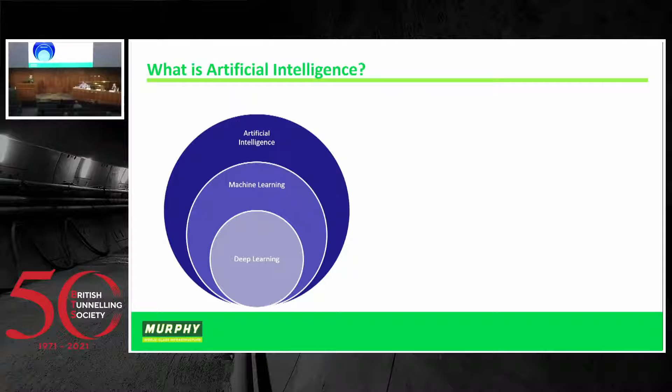Within this, we start getting into machine learning. Machine learning is a series of algorithms that learn underlying representations from data and try to learn the underlying patterns from data. Within this, if we go a little bit deeper, we get into algorithms that use huge structures called neural networks, and this is going to be the body of the work that I would have done whilst at Murphy's.

Breaking this down even further, we get 3 different fields of machine learning depending on what your needs are. If you are looking to try to predict what the fuel price is going to be, or whether someone's wearing their PPE, you'll probably rely on supervised learning for your prediction and forecasting.

Should you have any data that you wish to cluster, or if you have too much data that you wish to make a bit more concise, you would turn towards unsupervised learning. And finally, should you have any robotic excavation, or you're looking to control factories, you would turn to reinforcement learning.

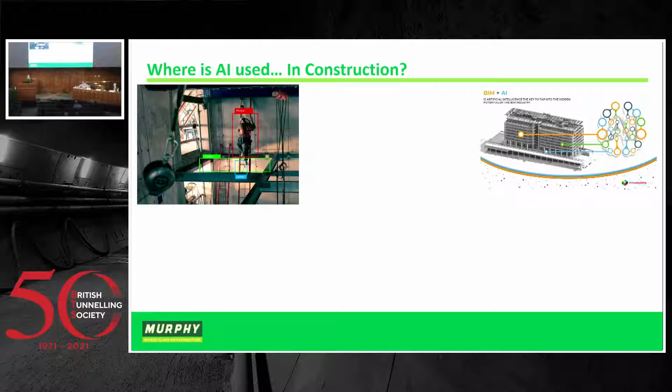Now, it may sound like it belongs in the realms of fantasy, but AI has actually already entered the construction industry. From looking at images and trying to understand whether someone's in a safe environment, to working with our good old friend BIM to make sure that teams are working more productively, ensuring that our suppliers are developing optimal logistics solutions, and, to my personal favourite, robotic excavators to address the skill shortage gap.

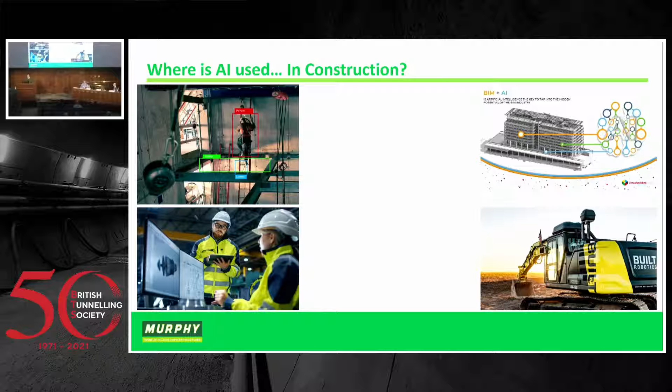Now, this all sounds very interesting. Some of it might even sound a little bit niche, but the value which AI is forecasted to bring into the construction industry is worth 1.8 billion for this year, which sounds quite big. And in 6 years' time, that number's going to get even bigger, looking at nearly 5 billion's worth in AI's value to the construction industry.

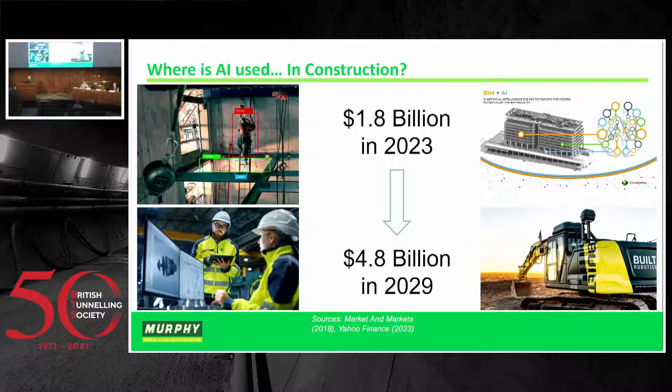Now, I was interested in trying to use AI in the tunnelling industry because forecasting tunnelling is difficult. I'm sure I don't need to remind any of you of that. And a lot of this difficulty stems from the tendering stage, where you have masses of data of all shapes and sizes that you're trying to process and understand.

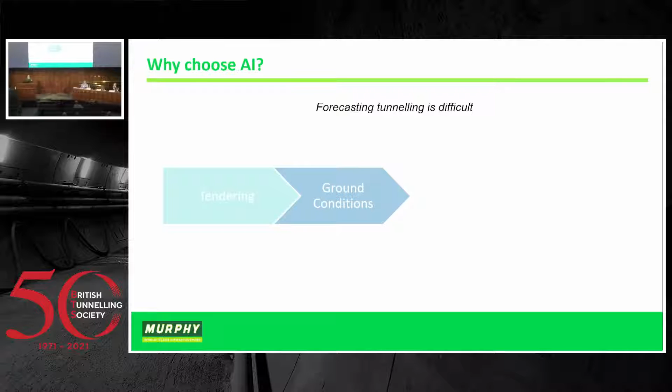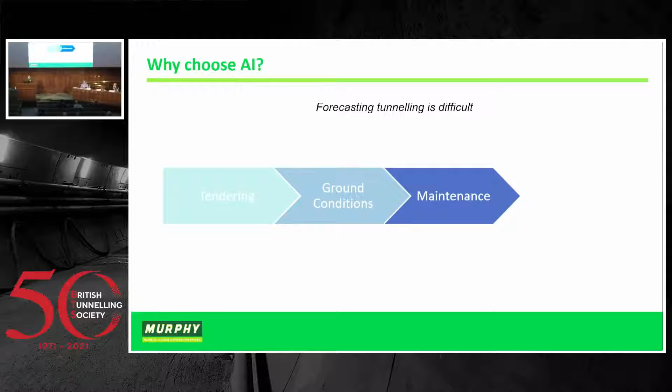A huge source of this variation comes from your ground conditions, which can range from your sands to your clays to your silts to groundwater levels, and all of this variety impacts your machine. This raises complications on when should we get fuel in for our machine, when should we get the teeth changed, and when are we going to have severe breakages. And these are all problems that project management need to address.

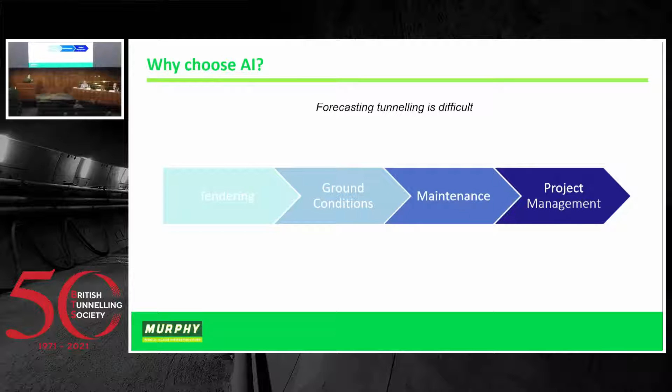And all in all, this data is a bit of a headache for project management. And AI could be a solution to try to condense this information so that we have data-driven approaches.

Now, I approached Murphy and Sons with this crazy thought of trying to put AI into tunnelling. Now, unlike some of the other sections in construction, tunnelling is relatively untouched when it comes to AI applications. Most of it is residing in the realms of academia, and there was a bit of uncertainty around this, and for good reason.

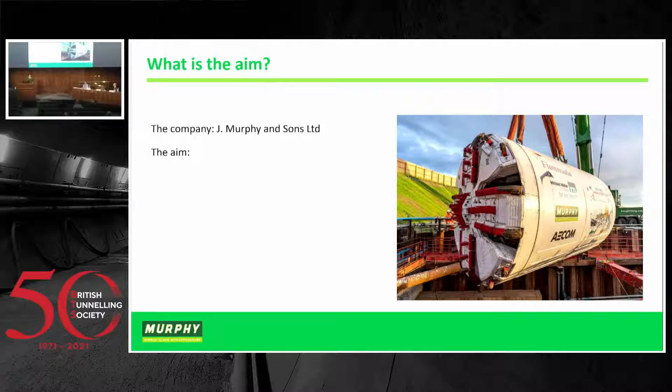We weren't too sure how well AI would actually do, or if it would be any good, leading to the main aim of the work I'm presenting today: establishing whether it is feasible to use artificial intelligence in the tunneling industry.

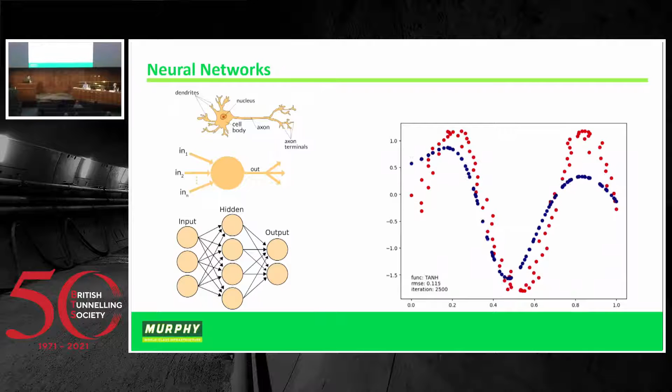For that, we need some tools, and the tool I'm going to talk about today is neural networks. These are a type of machine learning algorithm inspired by the brain. They take in a series of inputs into something called a neuron, and generate an output. All of these outputs are connected to form the network, and the weights connecting each neuron undergo changes during training as you try to fit your output to the underlying pattern of your data.

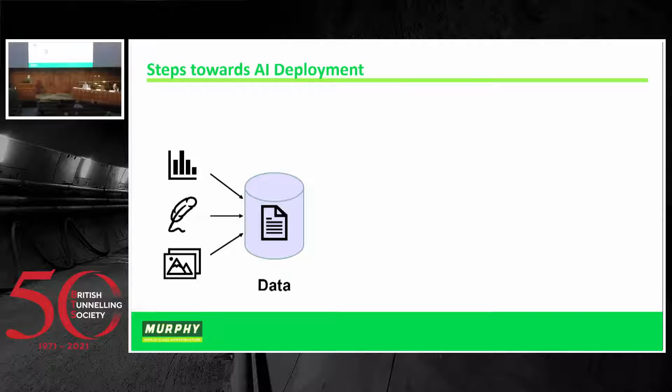This all sounds very exciting. How do we go about actually establishing it? Well first, with any AI-driven solution, you'll need some data. This can range from your humble Excel or PowerPoint to handwritten documents to images and films of your work site. The data can be anything you can imagine. But the most critical stage, and the reason why so many AI solutions flop at the first hurdle, is that they don't undergo proper cleaning practices. If you're putting bad data into anything, you're going to get bad results out, AI included. This is the most essential part of the whole program.

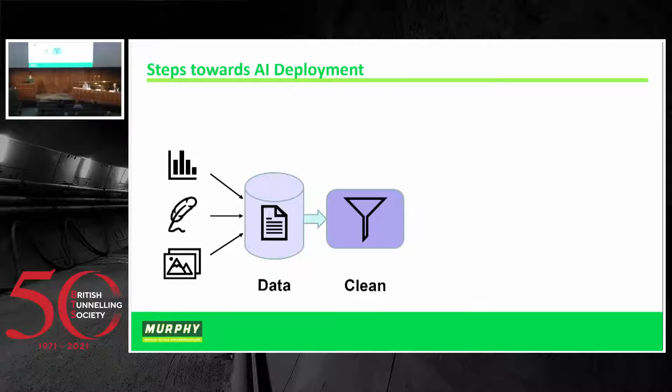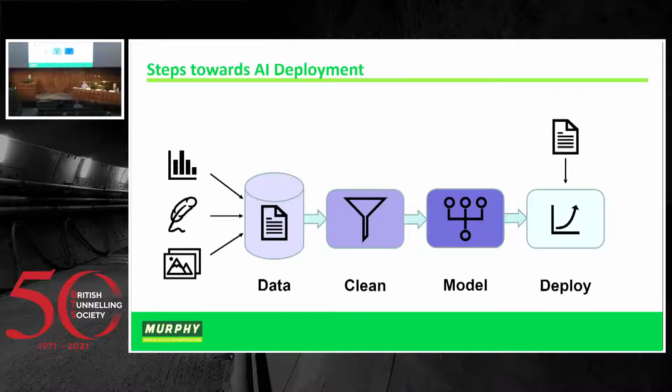Once you've collected your data, the next stage is to select your model based on the problem. For our example, we're going to use neural networks because we're looking at trying to create a prediction. Once we've trained our model on this data, we're ready to deploy it into the real world, where we give it new data and it can generate outputs that can be of use. Now comes the exciting part.

I'm going to talk to you today about two case studies. The first is a historic cable tunnel, which was used as our feasibility scoping exercise. The primary data set consisted of machine data and a bit of tunnel data, and this was a potential application for machine performance. The second, the North Bristol Relief Sewer, used purely geological data only, no other machine inputs. Its application was to be in the pre-planning tendering stage, or for forecasting how the rest of the build would go.

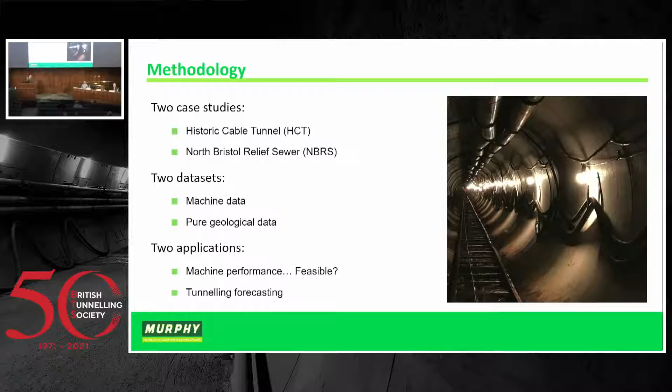Now, this historic cable tunnel was not an easy data set. It contains several parameters we were trying to work with. We've got some horizontal alignment, a bit of groundwater here, transitions from sand clay to chalk. And there was a bit of skepticism at this point — we weren't sure how it would work.

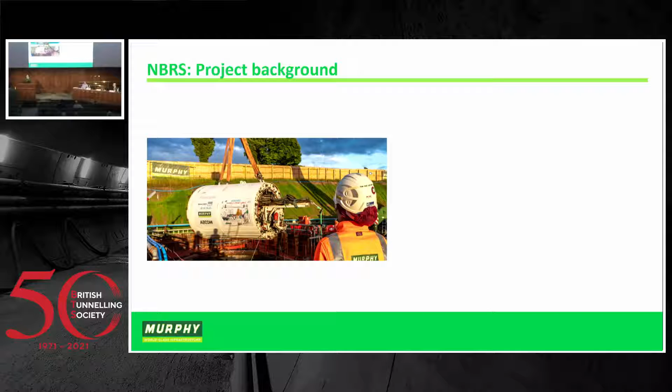This was exciting. Murphy was very excited, and the construction industry has plenty of other challenges to go for. This is where we put artificial intelligence to a proper test, starting with the North Bristol Relief Sewer. Here we've got our machine — it's an EPB Lovat, about 2.85 meters in diameter. The North Bristol Relief Sewer project is a tunnel about 5.5 kilometres long. At the time I finished working on this project, it was about 3 kilometres in.

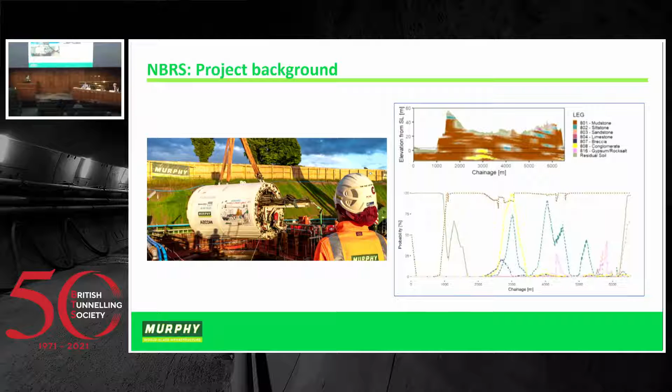The data set we used for this was given to us by Maxwell, and these are probabilities of the likelihood of coming across different ground conditions. This is where the challenges start. We were around here, and you can see some pink spikes and this lovely spike of sandstone. We only had this data to actually train our model.

Now, this is what we were expecting to see, and we had very little data on this sandstone. How is the machine going to behave when we go through sandstone? We've also got some additional water around this stage, and some extra gypsum over here. We haven't really got much information at this stage to go on. On top of this, you do not give your machine all of this data.

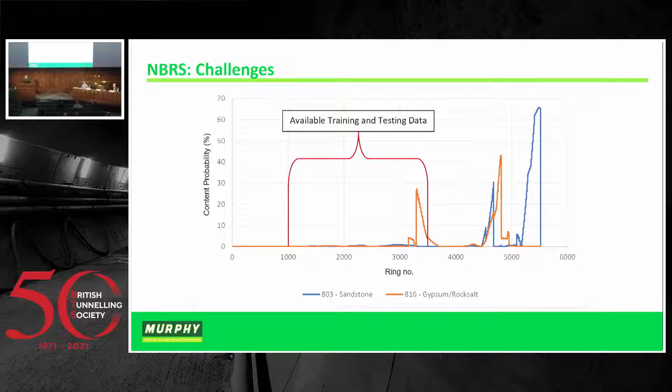You need to keep at least a third of the data away so that you can test that it's working. This makes it very challenging and means AI is going to have to learn the underlying behaviours of this ground if it's going to make good predictions. A further challenge to this, we have some outliers.

The aim of this project was to try and predict the ring cycle duration, that's the whole process it takes to make one ring. We're talking from the muck to the excavation to the logistics for the total ring. And there's a lot of other data points that aren't captured, meaning we've got some big spikes in the data and we don't always know why that is.

So how was AI performing? Well, on this sample of data, bear in mind this neural network has never seen any of this blue data before. If you were a project manager and you were just given this orange line of the neural network's predictions, you would see you're going to be expecting some tough times around this stage. And as you come later towards your build on ring 3290-ish, things are going to get a bit calmer. This can be very useful for trying to prepare how we're going to do maintenance, for example.

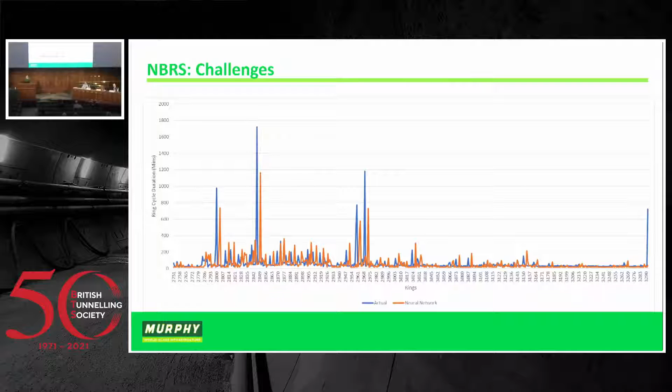But we're not stopping there. This is a small appetizer to what the real challenge was. We wanted to know when artificial intelligence thought we would finish this excavation by. So we fed in some data, churned a few cogs, and this is what the artificial intelligence would generate.

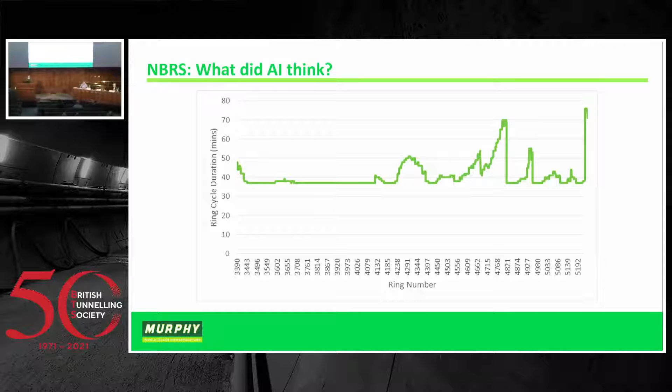Okay, so it thinks we're going to be having a bit of trouble here, a couple of spikes here. This might be the sandstone. And bear in mind as well, this was based on the average rings per week being around 63 rings per week at this stage. Now, this is where I would finish my predictions for Murphy.

I submitted my results mid-September. The neural network was not touched again for the whole thing. Any new data that came in, we would have to see what this neural network would do. And I predicted a finish on mid-February. The neural network was within 10% of the final date.

This is considering that it's predicting that massive spike of sandstone that we have no information on, the huge spikes in gypsum, all the other uncertainties, and this is also considering that the data it was trained on had an average rings per week of 63. What it actually was after that point had raised significantly to 111. The neural network had managed to actually capture that big jump in performance, predicting an average of 95 rings per week. This was an exceptional performance.

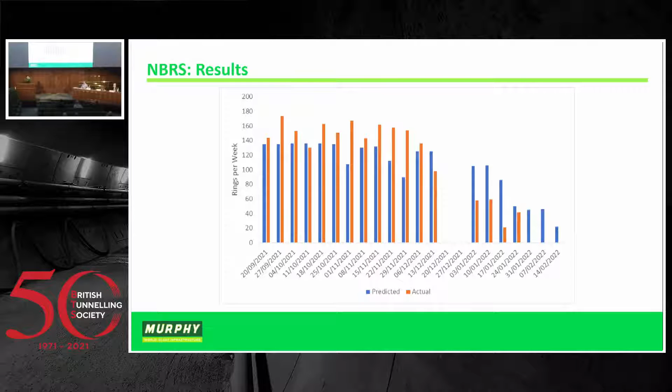Because of the results of this, this generated enough excitement for Murphy to start undergoing the process of bringing a PhD student on board to try to deliver future work. We're looking at trying to make this more of a reality.

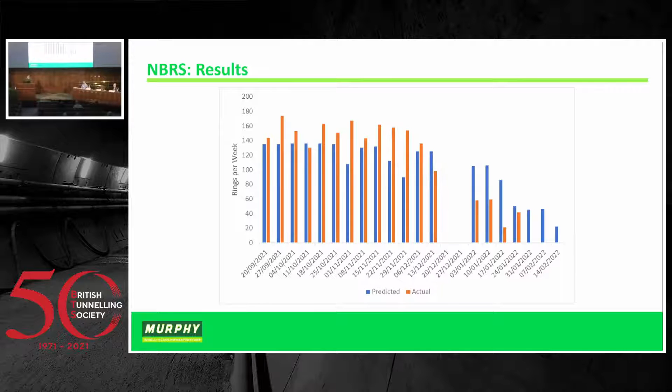And there are benefits to Murphy. We've got a model with very high predictive accuracy, and it's data-driven. We're not relying on as much guesswork. We're using the data that we've got, and we're compressing it down as something that's more manageable to help support project management in delivery. It was also shown to be able to capture the underlying behaviour and to be able to predict new data that it hadn't seen before.

And this can be very important if you're at the start of a tender stage. It can be the difference of deciding to go for a project and deciding this is too much of a financial risk for us to continue. And you can look at the best and worst case scenarios.

There's huge potential for Murphy, but also to the tunnelling industry. It's a benefit for all stakeholders as we can start having data-based decisions and start understanding where we might have problems and ensuring better planning. We can have huge access to future work.

And as a little note as well, this was also a benefit to academia. This project that was done at Murphy is unique because prior to that, all of the research at that time had only looked at predicting data on a completed tunnel. There hadn't been any predictions on a live tunnel, so we're breaking ground into new researching territories.

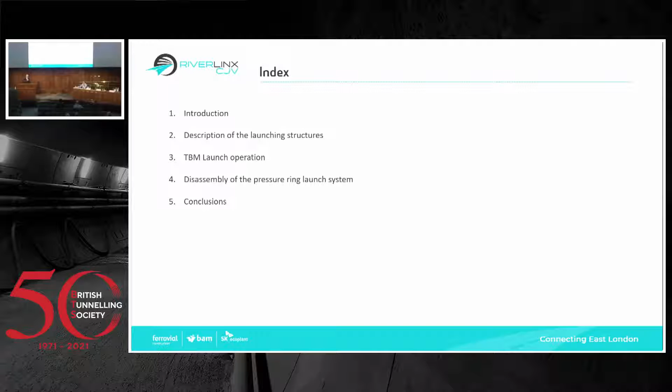So our agenda for tonight will be a quick introduction of the tunnel, speaking also about the reasons we had to adopt the method we have used and are currently using. Then I'll move on to the description of the structure involved during the operation, the operation itself, followed by the disassembly of the launching structures, and finalizing with some conclusions and the lessons we took after our first launch.

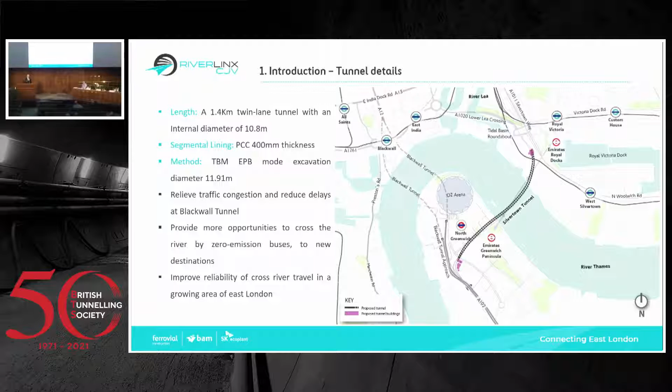So the Silvertown Tunnel project will be a 1.4-kilometer twin-lane tunnel constructed with the intention to relieve traffic congestion and reduce pollution around the Blackwall Tunnel, and also to give opportunities to cross the river using public transport with new passage routes. This tunnel will have an internal diameter of 10.8 meters with 400 mil thickness segmental lining. The tunnel is being constructed using an earth pressure balance mode tunnel boring machine with 11.9 meter excavation diameter, which is actually the largest TBM ever built in the UK.

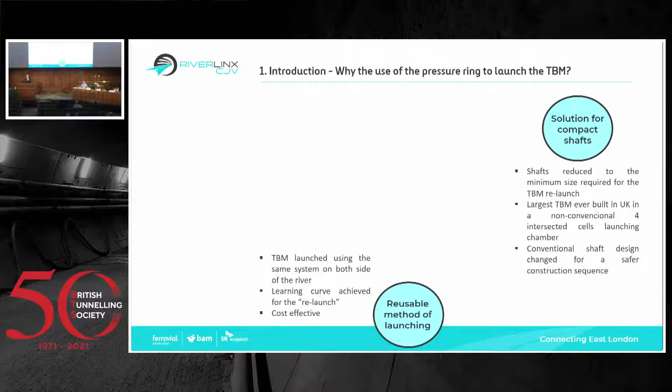So to understand why this methodology was chosen, I gathered 3 reasons. The solution worked for a compact shaft. Due to the space constraints in the launching chamber at Silvertown, and particularly the rotation chamber in Greenwich, those shafts had to be constructed to the minimum size required to assemble the TBM and the launching structure. Therefore, a more conventional type of launch would have been a real challenge to fit in. Also, this system was valid to be reused for both shafts, and the structures could have been reinstated for the second launch. And after the first launch, we were able to achieve the learning curve, so that was also quite decisive.

The construction of an adit to partially allocate the TBM was dismissed because of the complexity of this work due to the shallow and difficult ground conditions around the area.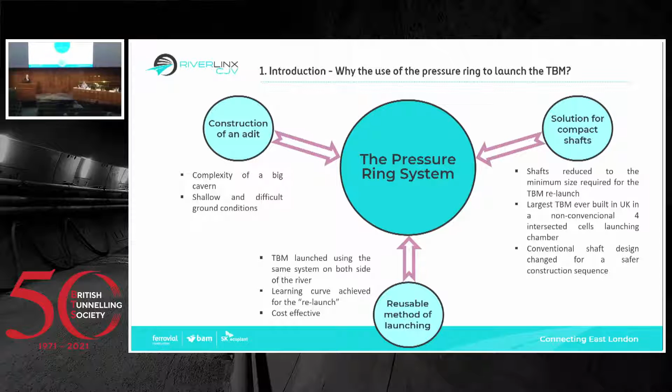Now I will briefly explain the 4 structures that got involved during this operation.

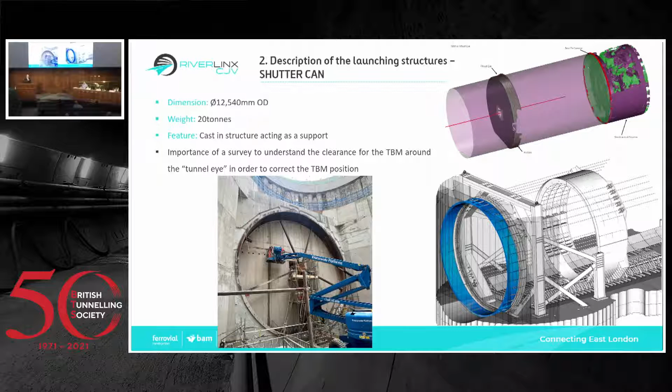What you can see on the screen is what we call the shutter can. It's basically a circular structure that got embedded into the concrete head wall and acted as support for the following structures. After the assembly of this one, we were able to scan and survey the TBM when it was getting constructed, to understand the clearances we were going to have between the skin and the tunnel eye before we were pushing the TBM against the wall.

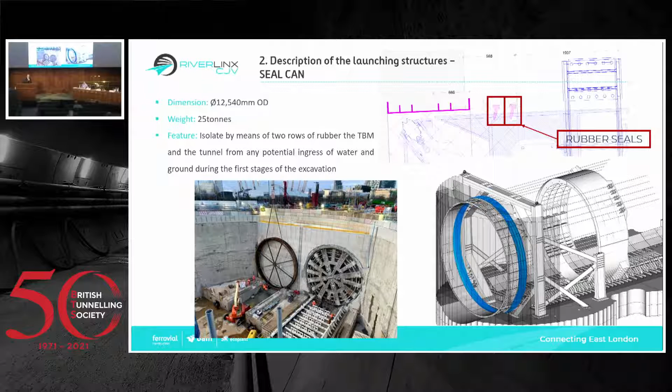The second structure is also a circular one. It's the seal can that was connected to the previous one, and its main feature was to isolate the TBM, the skin, and the primary lining from any potential ingress of water, thanks to the 2 rows of rubber that were installed in the internal perimeter of the structure, making full contact with the skin and the ring during the first stages of the excavation.

This big framework is the thrust frame and was capable of receiving the imposed loads required to move the TBM, and also to transfer those loads into the slab and ultimately to the ground.

The last structure is the steel ring. It was a circular structure of about 100 tons of steel. That piece was loaded by means of an external source, which in our case were four groups of cylinders connected at the back of the steel ring, and that one was able to transfer that load to the skeleton of the TBM and the thrust frame simultaneously.

The way we loaded, or the way the thrust frame was loaded, was by means of those steel bars that were connected across both structures between the steel ring and the thrust frame. So the cylinders installed at the back were able to tension them.

Despite this structure being pretty much a circular structure, it was not symmetrical or completely symmetrical due to its working condition. It was expected to push harder at the bottom of the ring because of the weight of the machine, and also to try and keep the verticality, the vertical offset of the TBM, as this one was getting buried into the ground. So the bottom half of the ring was better reinforced for that reason.

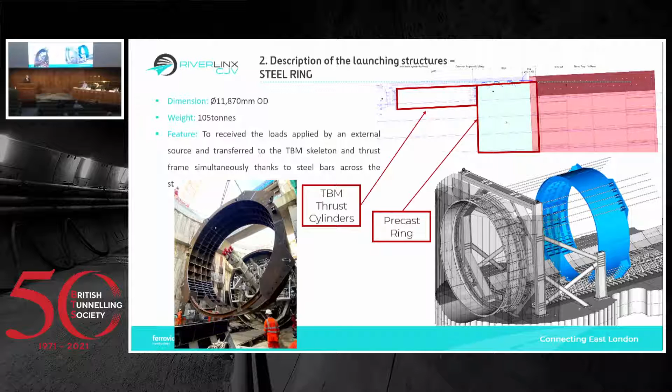Also, as you can see at the bottom quarter of the ring, there was a void created on purpose due to the launching sequence. As the machine was progressing, moving forward, we had to install rails for the TBM, or for the backup gantries, to roll over them.

It's important to understand the interference, or the interface, between the two teams when we were constructing the shaft: the tunnel team and the civil team. They worked together in order to place and locate the foundations, the columns, and the base slabs in the right spot.

For instance, we used this kind of template to minimize any potential error we might encounter later when installing the structure above the slab level. That slab had to be constructed with a 4% gradient downhill, as well as the upright structures, the head wall, which had to be perpendicular to the alignment due to the nature of the tunnel.

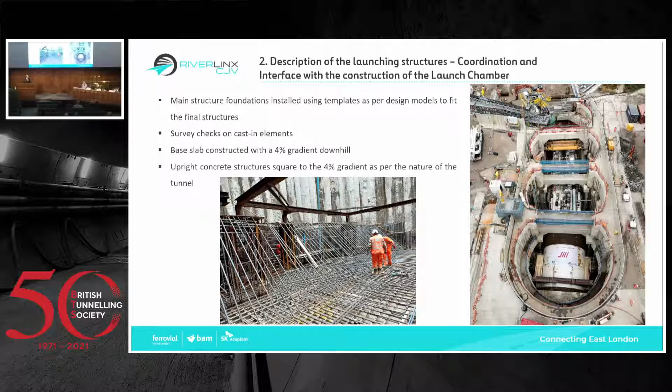Moving on to the operation of the system, as I said earlier, both structures were connected thanks to the DB bars that were tied at both sides of the structure, so those cylinders were capable of loading them.

It's very simple to understand how this system worked. Basically there was what I call a rear lock nut tightened to the back of the cylinder. As the machine was starting the excavation and marking out, the cylinder started extending until reaching the final stroke, which in our case was around 200 millimeters. After that, we had to tighten the inner lock nut inside the stool against the steel ring to keep the tension of the bar, so we were able to retract the cylinders and then move the nut forward. After all the cylinders were reset, we were able to resume the excavation with a new cycle.

We need to know that all the functions of the TBM were enabled by the thrust system for obvious reasons. So when the conditions were sound to excavate, it was up to the TBM driver and the hydraulic power unit operator to agree when to resume this operation.

In the table, that table is just showing as a reference the amount of strokes we had to achieve in order to cover the total distance of the launching, and the speed rates of the power unit. I'm saying it's a reference because we were not able to match those figures exactly.

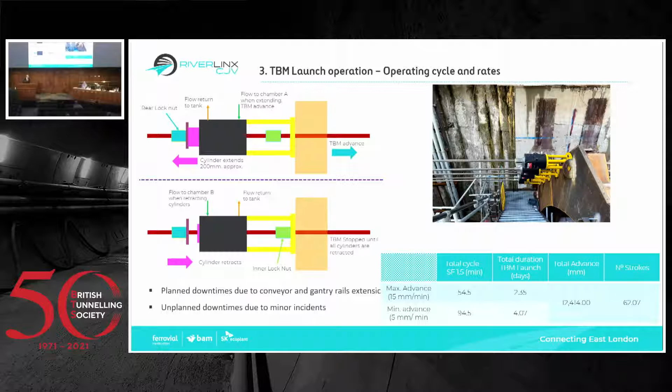Basically, because not all the cylinders could extend at the same time, we had planned downtimes, as I said before. We had to stop for the extension of the rails and the conveyor structure at the back of the TBM, and also we suffered a few unplanned downtimes that I'll explain in the following slides. Despite that, the team managed to cut the original program by 2 days.

This operation was monitored and controlled by providing real-time data to both the TBM operator and the hydraulic power unit operator, to see at a quick look the excavation parameters: the thrust, the total thrust force, the stroke of the cylinders, and the advance of the TBM.

Thanks to 4 draw wire sensors installed on the corners of the ring, we were able to see the advance of the TBM, as well as to understand the squareness of the ring and try to correct it in case of any discrepancy.

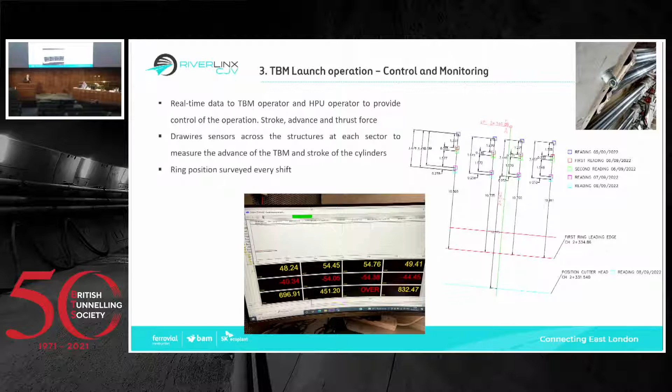Also, the first concrete ring that was previously built inside of the tail skin was surveyed at every shift for the same reason, to understand if there were any kind of deviation or deformation of the ring.

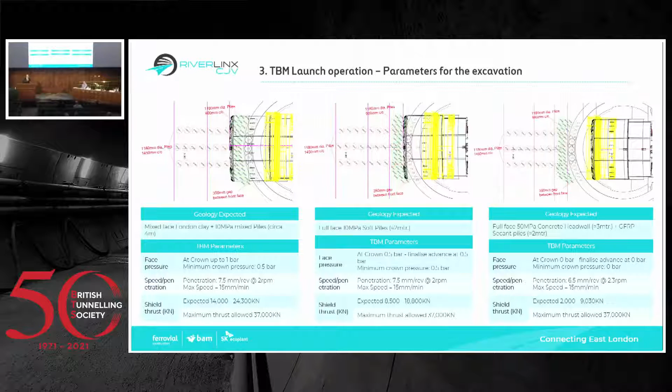As for the parameters for the excavation, it was decided to split this advance into 3 different scenarios based upon the different ground conditions the TBM was going to encounter, so we could better assess the expected thrust due to the friction and the increasing of the EPB.

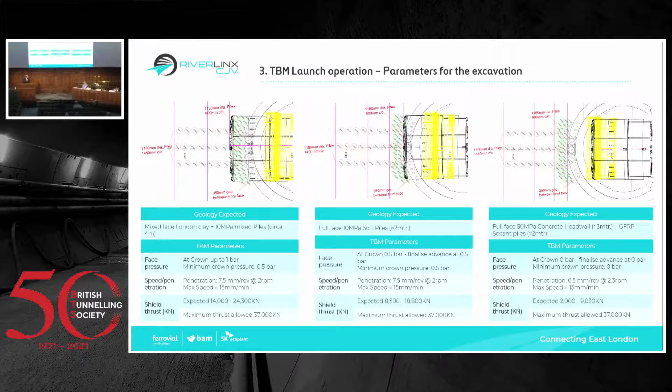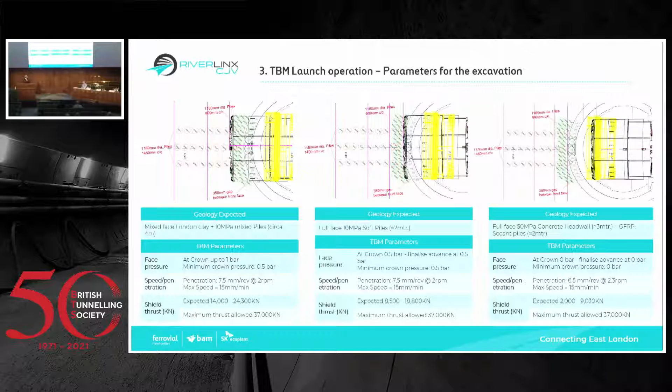For instance, in the first stage, when the machine was excavating through the head wall and the secant piles, it was expected a thrust force up to 9,000 kilonewtons. In the second stage, when the machine was already in soft ground, up to 19,000 kilonewtons, finalizing with a maximum total force expected between 25,000 kilonewtons and an EPB between 0.5 and 1 bar at the crown.

Another minor incident happened near the completion of the work. The gasket of the key segment was not making full contact with the steel ring, and as soon as that joint passed through the in-by seal of the seal can, the water found a pathway into the seal. So we basically injected an expansive foam to close the gap.

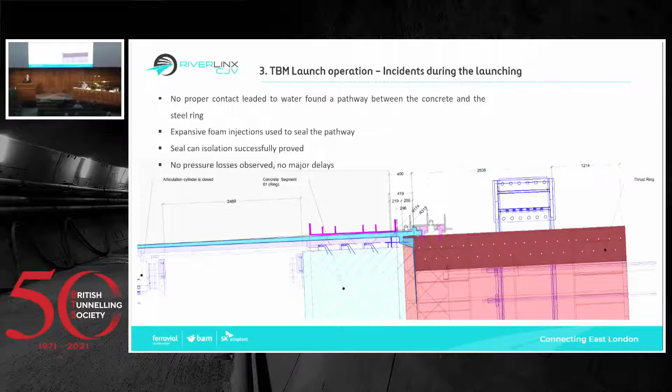After the completion of the launching, both structures, the steel ring and the thrust frame, were locked and left in position to give enough support for the TBM to keep advancing, basically for 2 reasons.

We didn't have enough room at the back of the TBM to complete the full assembly of the machine, and also because there was not enough friction between the ground and the lining in order to overcome the required thrust for the machine to move forward. So after 45 rings were installed in the tunnel, it was decided to stop.

At that point, we should have had theoretically around 137,500 kilonewtons, which was, as a figure, much higher than the required force to move the TBM at that time, around 50,000 kilonewtons.

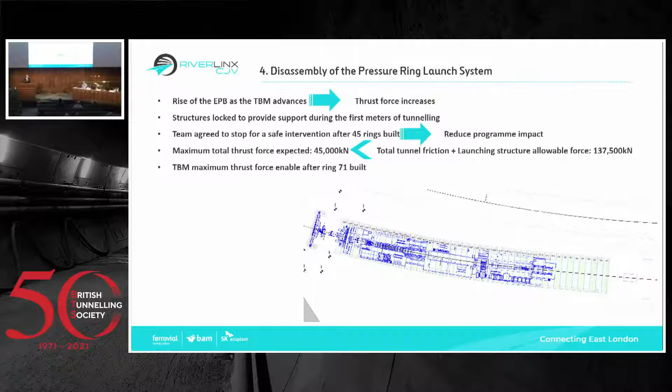So when we parked the TBM, we were able to dismantle the launching structures and reconfigure the pit bottom to improve the logistics of the tunnel.

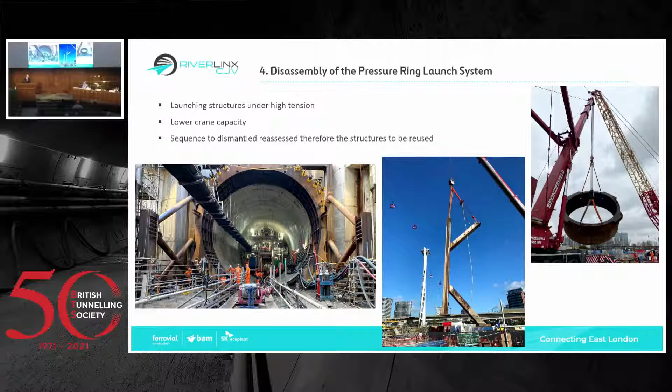The operation for dismantling those structures was not without a challenge, since at that moment our crane capacity was much lower than the one we had originally during the assembly of the TBM. We had to rethink and restudy how to dismantle and strip down those structures into singular and smaller pieces, without damaging them, since they had to be reused and transported across the river, to the other side, and getting ready for the relaunch in Greenwich.

Before I move on to the conclusions, I just would like to mention the notes or the lessons we took over Greenwich for the relaunch. Firstly, we had to redesign a couple of the structures.

For obvious reasons, the shutter can that got embedded in the concrete portal was fabricated again, but this time narrower, with just enough width for the cutter head to spin inside. Also, the steel ring got, among other reasons, more reinforced.

Basically because of the incident we had, and also that void I mentioned at the beginning of the presentation, left at the bottom of the ring, was filled with a new panel that gave complete circularity to the bottom of the ring. Because now the launching sequence is slightly different, the rails don't require moving over them.

As for the operation, we have implemented a more intuitive display for the operators to understand better the operation and read better those parameters.

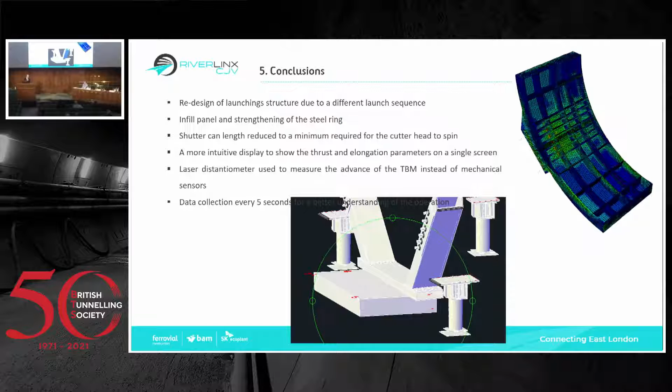So just to conclude this presentation, I wanted to say that the solution or methodology adopted and approved by the CJV, along with the technical office, the designer, and the client, has proved to be well assessed. A wrong methodology would have caused significant delays in the program and cost.

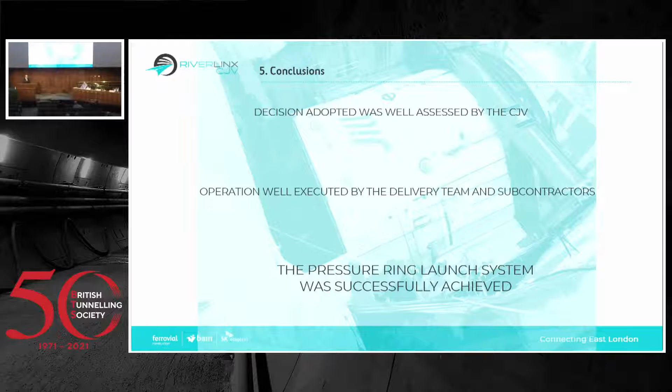I also want to say that this solution was successfully achieved thanks overall to the well-executed operation by the delivery team and the subcontractors who understood perfectly this methodology. Thank you.

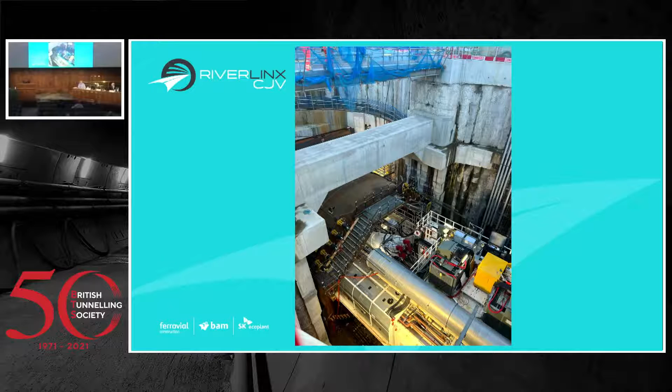Right, thank you very much, Ricardo. Have we got any questions, please? Yeah, I'll start it all again. Okay, cheers, thanks very much, Ricardo. That was a very good presentation.

The over-stress and buckling of the steel frame that happened — did you resolve why that happened? Was it something to do with the ground, or just keeping the TBM level, or friction?

Yes, we kind of understood why this happened. Basically, we have two hypotheses. The first one is related to the fact that the structure was not capable of receiving, let's say, eccentric loads left to right.

So we had to push quite symmetrically, and also during the launching, one of the thrust cylinders at the very bottom of the ring was faulty, so that cylinder was not supporting that area of the steel ring. We think that lack of support also helped that joint to somehow displace or move, and those are the reasons we think that damage happened.

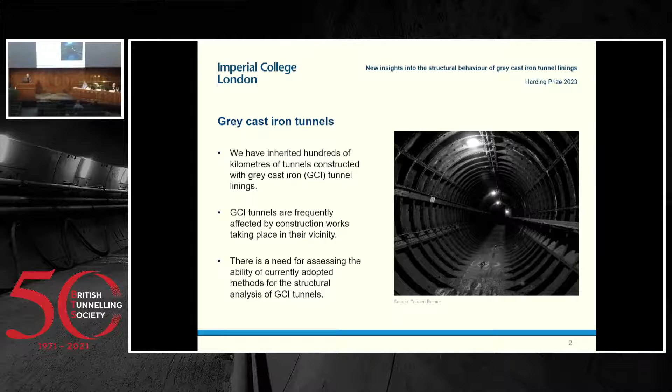In the paper I submitted, I considered two different questions. The first is: what is the influence of longitudinal joints on the response of segmental cast iron tunnels, and in terms of their analysis, whether we should be treating them as rigid or flexible structures. In answering this question, I'll introduce an alternative to these two methods. The second question is: what is the stiffness of bolted tunnel joints, and what is the role of the bolts in the behavior of the joint? I'll very briefly touch upon the second question, and will be focusing mostly on the first.

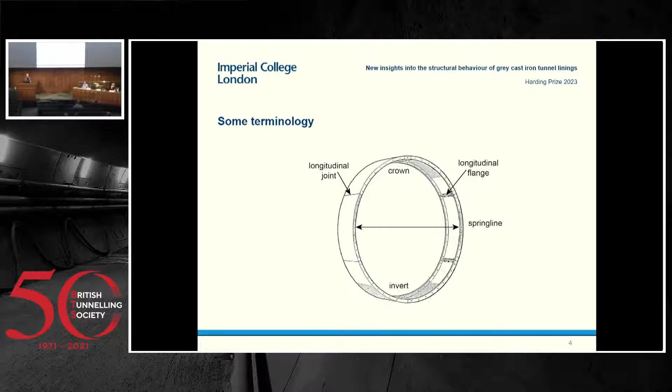It's useful to consider some of the terms I'll be using later on. I'll be considering only the analysis of a single ring, so whenever I refer to joints, I'll be referring to longitudinal joints, which, as you've seen in the image, are the ones connecting segments of a single ring. It's also useful to know that crown, invert, and springline, as you know, are the usual terms for denoting the different locations around the ring. In terms of sign convention, positive bending moments will be those generating tension at the intrados, and also opening of the joints at the intrados, whereas the opposite bending mode will be taken as negative.

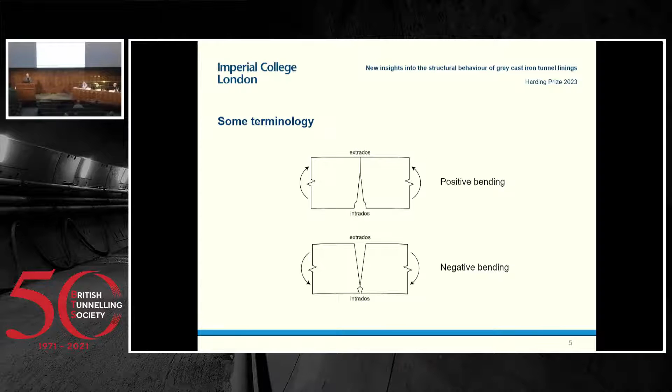I'll be referring to squatting and tunnel squat. Squatting is the typical deformation mode observed in tunnels of the London Underground network, where there is an enlargement of the horizontal diameter while the vertical diameter has reduced. I'll be expressing the tunnel squatting percentage as the ratio between the increase in the horizontal diameter divided by the diameter of a circular tunnel.

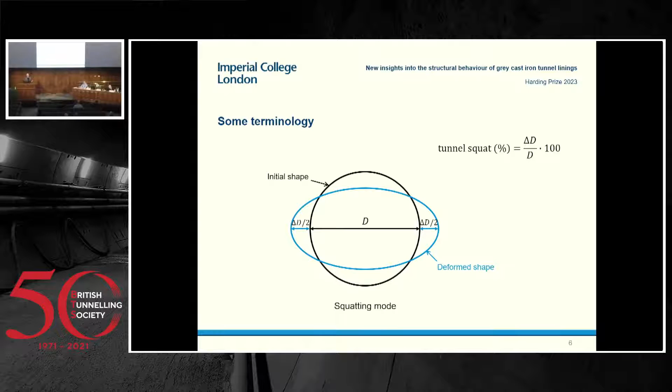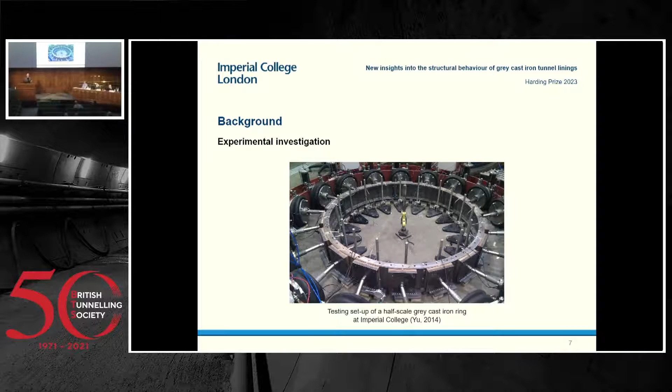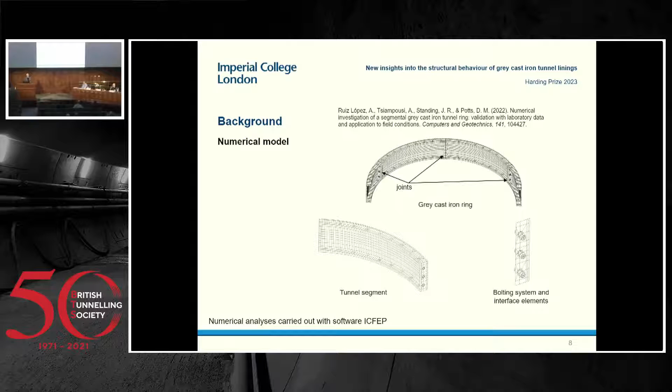Now moving on to the actual methodology. The numerical model was framed within the elastic continuum model, which is a well-known analytical solution for tunnel lining forces and displacements. This solution, among other assumptions, assumes that the tunnel lining is continuous, neglecting the presence of the joints, which in the case of segmental tunnels, and in particular grey cast iron tunnels, is usually addressed by either adopting a rigid ring approach, where we adopt the full bending stiffness of the cross-section, or a flexible ring approach, where we apply some reduction factor to that bending stiffness.

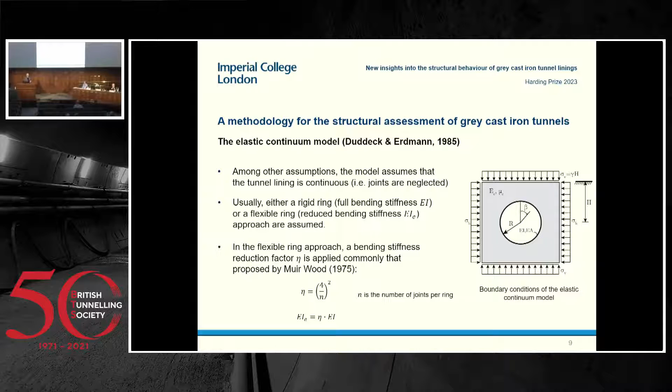In the case of this latter approach, the reduction factor usually applied for cast iron tunnels comes from the well-known work by Muir Wood in 1975. I have the expression here. Eta essentially depends on the number of joints per ring, so it can be regarded as an empirical reduction factor. I'll later be comparing my numerical results against these two approaches, the rigid ring and the flexible ring.

Regarding the setup of the numerical model, it aimed to replicate the assumptions involved in the elastic continuum model. Soil stresses were applied directly on the tunnel extrados, and tunnel depths of 10, 20, and 30 meters were considered. The reaction of the soil was simulated via normal and shear springs acting all around the ring. Two different interface conditions were considered between the tunnel and the soil: first, full bond conditions, where no slip is allowed at the interface and shear stresses are transferred across it; and slip conditions, where relative displacement is allowed at the interface and no shear stresses are transmitted across.

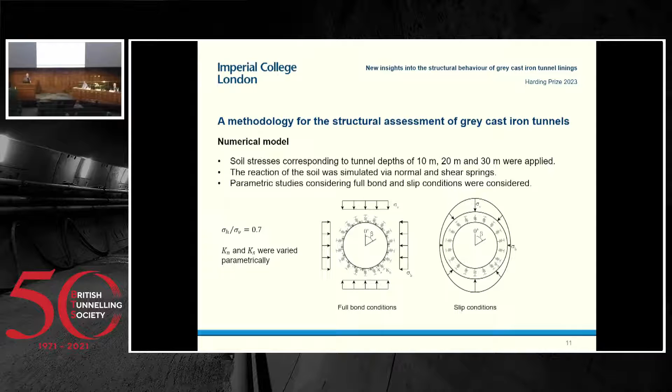It's also worth noting that, as you see on the left, the ratio between the total horizontal and total vertical stresses was taken as 0.7, as this enabled the tunnel to deform into the squatting mode, which, as I mentioned before, is the typical deformation mode that these tunnels deform into. Lastly, stiffnesses Kn and Ks, the stiffness of the springs, were varied parametrically in order to investigate the influence of the joints at different squatting levels.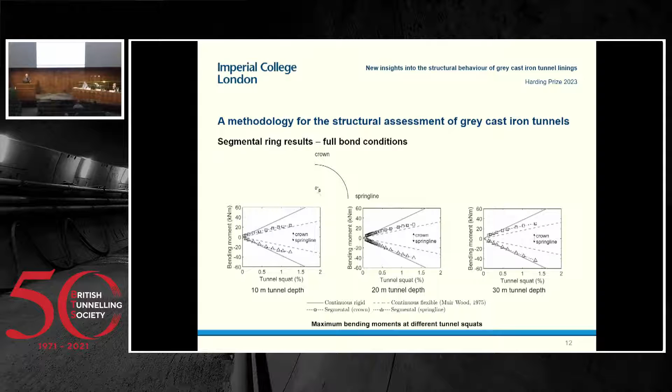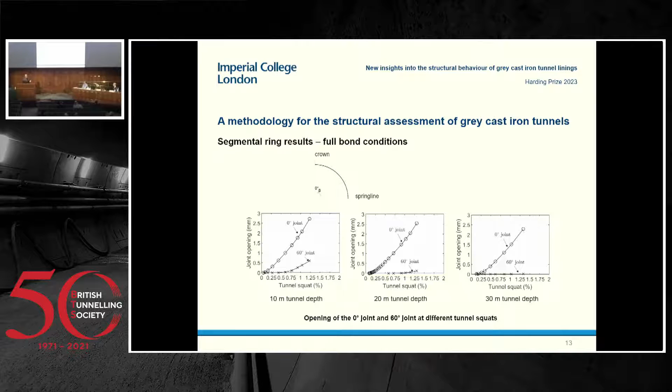So I've mentioned that adopting Muir Wood's reduction factor can result in non-conservative results, but also using the full bending stiffness can result in overly conservative results. So I'm proposing a third approach here, where we adopt a flexible ring approach, but in this case replacing Muir Wood's factor by a new set of bending stiffness reduction factors that are derived from my numerical results. Based on the fact that the stiffness around the ring is not uniform, as we've seen in the comparison between the crown and the spring line, I propose three factors for each tunnel condition.

The first factor, the lower bound factor, would be obtained from the bending moments at the crown. Then we would have the upper bound factor, which would come from the bending moments at the spring line. And finally, we would have the global reduction factor, which is meant to be representative of the average stiffness reduction around the ring, which is obtained using the tunnel squat given by the numerical model and some rearrangement of the equations provided for the elastic continuum model.

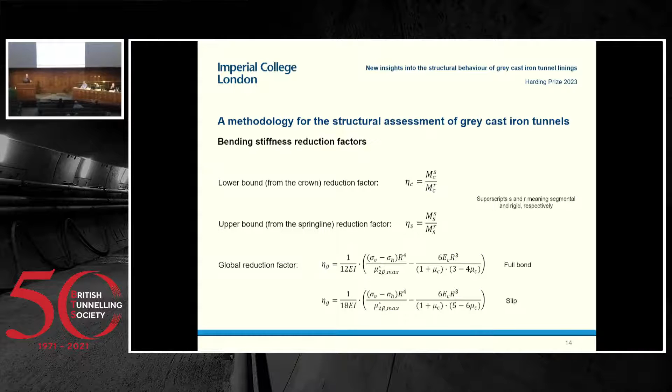If we apply these concepts to the parametric studies that I conducted, we end up with 6 charts that you see in this slide. Each of these charts corresponds to a specific interface condition and tunnel depth. And we also know that for each tunnel condition, these 3 reduction factors vary non-linearly with the tunnel squat. So the way these factors can be used in practice, based on a given tunnel condition, we would adopt one of these design charts, or we would interpolate between them.

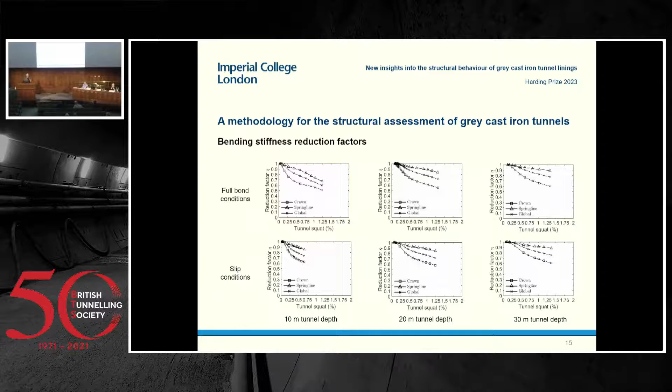We can use the crown and the spring line factors, which are based on bending moments, to correct the bending moments given by some calculation method, which can be the elastic continuum model or another calculation method. Whereas the global reduction factor can be more appropriate when we are dealing with displacements. Remember that it is based on the displacements of the model, and it can be, for example, adequate when we are dealing with a typical situation of assessing the displacements of an existing tunnel, and we are using, say, a finite element solver that doesn't have the ability to include these joints explicitly. If we know the tunnel squat that the tunnel in question has deformed into, we can apply this global reduction factor there.

So, some conclusions: the bending stiffness of the segmental ring reduced with tunnel ovalization due to joint opening. Deeper tunnels showed a stiffer response due to the higher compression acting at the joints. The stiffness degradation was more prominent near the crown than at the spring line.

The segmental ring had a softer response than that predicted by a rigid ring, but it was stiffer than a flexible ring when using the reduction factor proposed by Muir Wood.

Based on these results, a new set of bending stiffness reduction factors was proposed. As observed, these are a function of the tunnel depth, the soil-tunnel interface condition, the tunnel squat level, and the location around the ring.

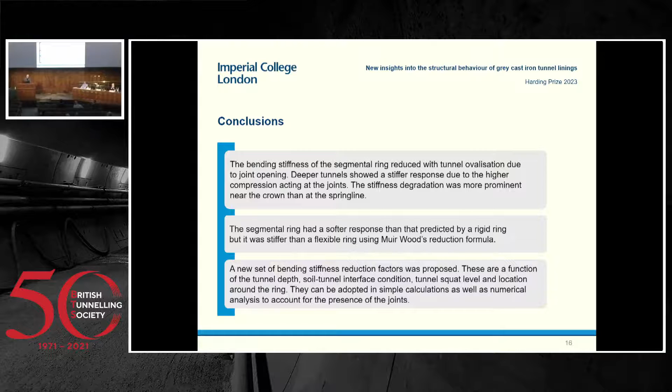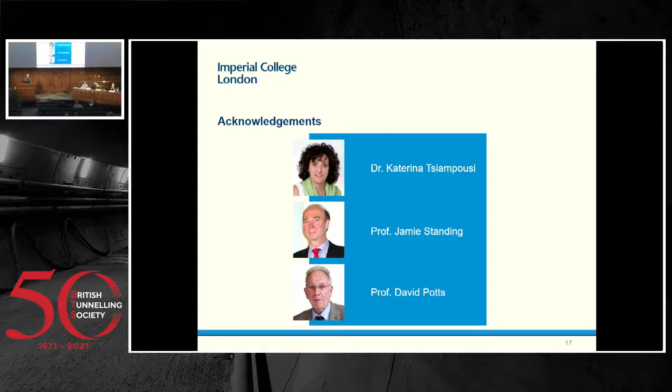They can be applicable in simple calculations as well as numerical analysis when we want to account for the presence of the joints. Lastly, I would like to acknowledge my co-workers, my PhD supervisors, Dr. Katerina Tsiampousi and Professor Jamie Standing, as well as Professor David Potts. Many thanks.

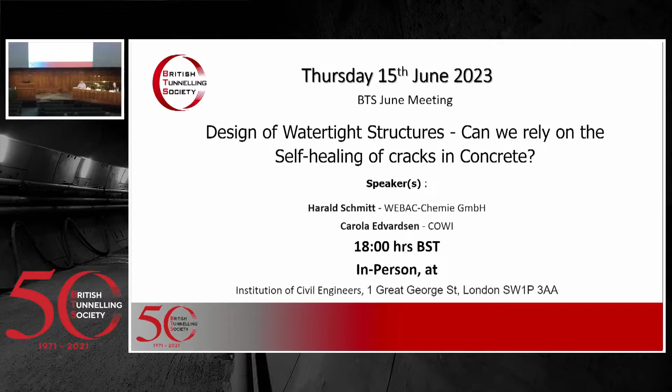There's also a general call for papers about any project or research. Please email into the BTS if you've got any ideas or any other colleagues that could present. We're always looking for presenters for all our future meetings, and that's also the same for the young members - they're always looking for people to present as well.

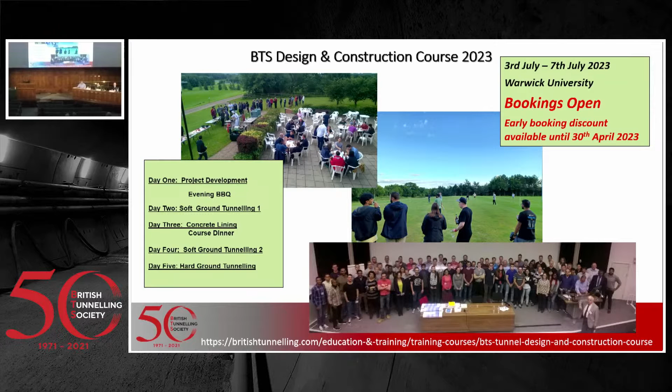Moving on to the BTS Design and Construction course. Bookings are going well, but there's still plenty of time to book people onto that. So anybody you know that will benefit from the 5-day course at Warwick, from the 3rd to the 7th of July - there is an early booking discount that will run out at the end of April. There are up to 5 sponsored places available. We've extended the application date to, again, the 30th of April. So if you know anybody that will comply with the requirements for the sponsored places, please encourage them to apply.

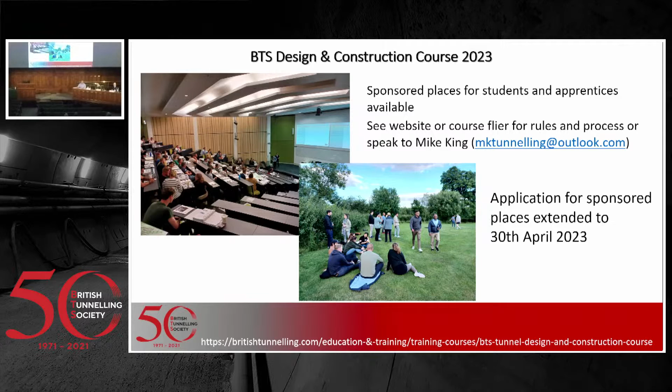Right, and I'd like to announce that our judges have decided that Jake Rankin, on artificial intelligence for forecasting tunnel progress, is this year's winner.